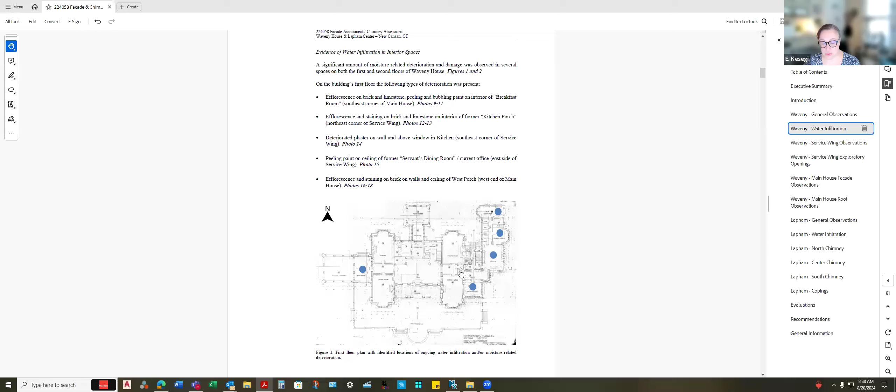There's photos of some of the interior damage within the building. This is the breakfast room where we had some efflorescence, that white staining that you see on the brick there. That is below a recently replaced roof on the terrace above. Again, in the same room, we have bubbling paint, staining on the stone, staining on the brick.

And then these are all located, this is what they would call the kitchen porch originally. We have some staining above the windows. And then this is in the kitchen where we have significant plaster damage in the corner of the space. There's also leaks on the first floor in an office storage space, and then some more efflorescence. This is the west porch area.

These are the leaks that are concentrated on the second floor. Again, pretty much evidence of water infiltration in every one of these second floor spaces on the service wing. And then there is some minor water infiltration damage on the areas that are also indicated in blue on the second floor.

Following up with some photographs of the extent of the damage related to the leaks on the east elevation of the service wing. Mostly it's shown as deteriorated plaster, bubbling paint. We did not see any active leaks when we were on site, but obviously all of these areas of damage are indicative of there being moisture within the walls that is entering the building. So you can see it's pretty significant in these areas.

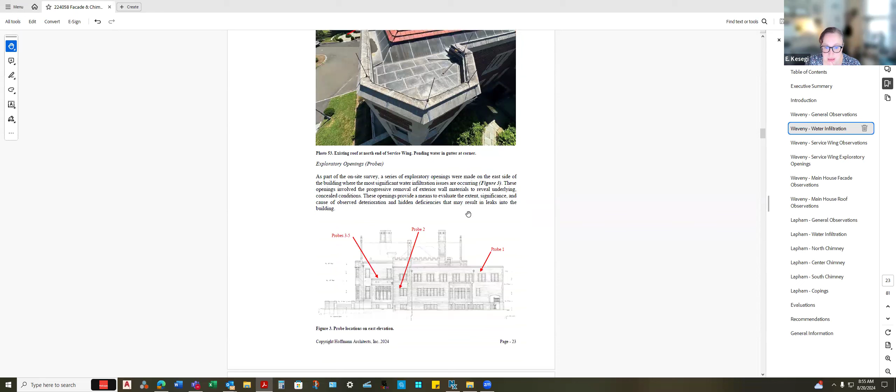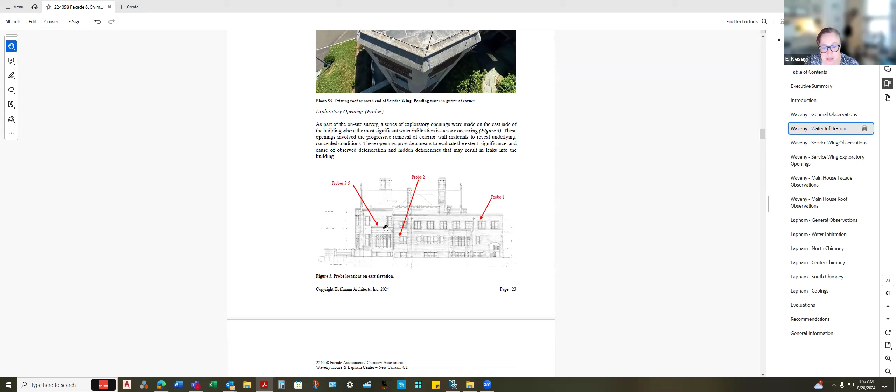So what we did was on this east elevation of the service wing, we did a couple probes to see if we could see what was going on inside the wall assembly that might be contributing to these leaks. So we did one above a window on the second floor. We did one above a window on the first floor. And this is that kitchen area where I showed you the photograph of the significant amount of plaster damage. And then we did a couple openings on the roof above the breakfast room.

So this is a probe we did above the second floor window. We removed a section of brick. We noticed that there is an existing copper flashing that was installed at some point. That does not appear to be original to the building, because this was one of the only locations where we found this flashing. So it's possible that there were past leaks going on and this was someone's attempt to remedy that situation. So we basically started removing bricks, wythe by wythe, to get as close as we could to the interior of the building without disrupting any interior finishes.

So here you see, we went all the way back from this location. I think it was about 3 to 4 wythes of brick before we hit this back side of the copper flashing. This terracotta block that you see in the back, on the opposite side of this is actually where you have your interior plaster applied. So if you were to open up the wall, you would see the other face of this terracotta block. So it looks like they installed the flashing and did put a vertical leg on it, which is good because you want to have a location where if the water gets in, it can't go back into the assembly.

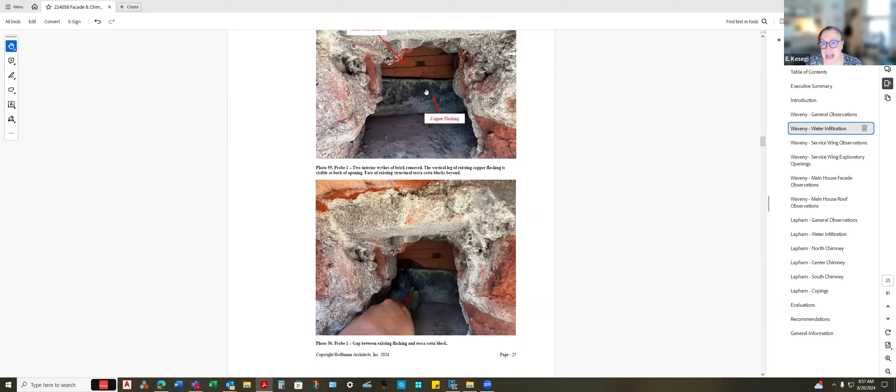However, there's a significant, probably half-inch gap between the backside of this flashing and the terracotta. So what that means is any water that gets into this assembly, that gets behind that back wythe of brick, can just get right into your interior wall assembly. Usually these terracotta blocks, also with most backup materials, they are, how do I describe this? With face brick, we make sure all the joints are solid and fully tooled and the brick is set in solid mortar.

Usually with backup materials, it's a little less of a quality of installation. So you'll find that there's holes and gaps between these terracotta blocks where the mortar doesn't fully cover the joints. I believe too that this might be an opening within the block itself. So there's many locations where the water can actually, once it gets to that point, get into the building. So you want to do as much as you can to prevent the water from getting to that point.

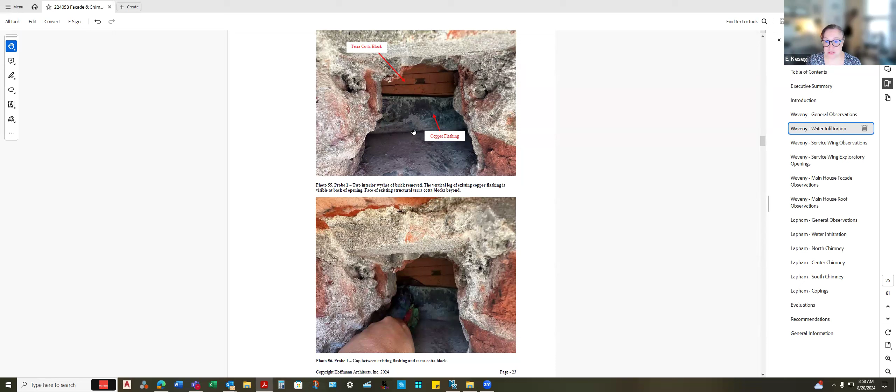So this is just showing here where we can actually fit a tool behind the flashing at this point. Proper construction would be that this flashing would be terminated and sealed across the top, so that gap wouldn't exist. So that water that runs down the face can hit this flashing and then somehow make it out through the face of the brick.

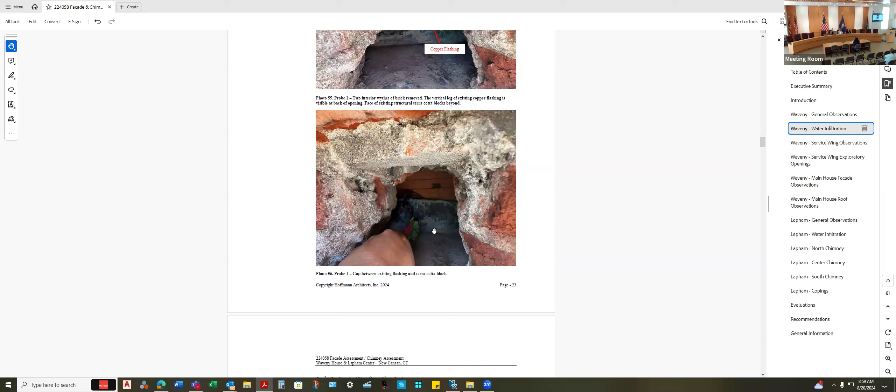So this was the second probe that we did above the kitchen window. And this is more evidence of the original construction. So we don't have that flashing, which was likely a later addition. So it's just solid masonry from the face of the wall all the way back. We did find a piece of steel in here that we assume is supporting the stone behind us. So it's spanning the opening. It's basically a lintel spanning the opening and supporting the stone and the brick above.

You can see here what I mean about the condition of the mortar joints in the interior wythes of brick. Not of the same quality as the outer wythes. So if water did get in here, there's many locations where it can get behind the mortar and into the wall. Did not see any indication of rust or deterioration of the steel itself. Right now, I think what we feel is the water infiltration on the kitchen level is more associated with something going on at the top of the wall with the copings and the open joints in the limestone, as opposed to coming in through the window head.

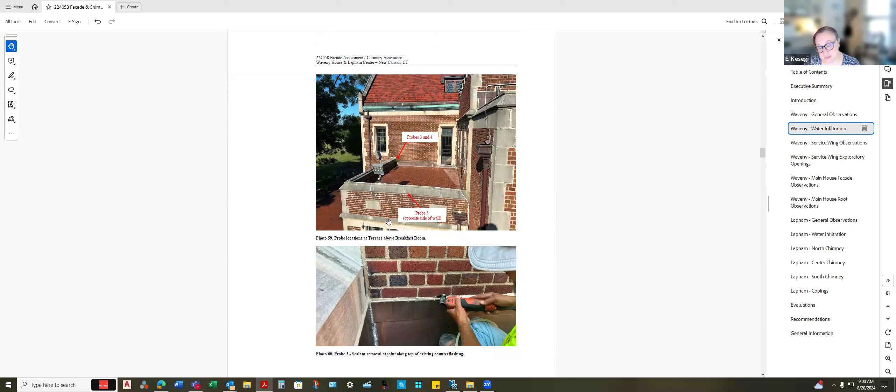The last 3 probes that we did, as I mentioned, are on the roof above the breakfast room. So if you recall the photos I first showed where we had the efflorescence on the brick wall and the interior, the peeling paint, deteriorated mortar joints and things like that on the inside. This is the roof directly above. This roof, I'm not sure when it was replaced, but it is also a recent replacement. And you can see here based on the condition of the copper flashing. Again, here's a condition where they sealed between the brick and the flashing.

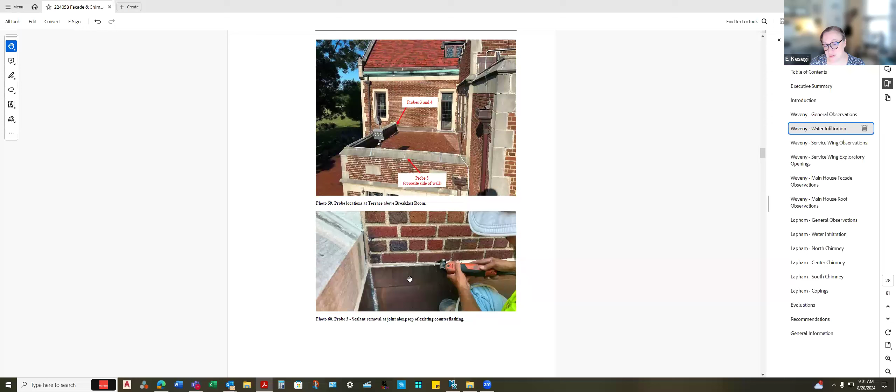So we opened this up because we just wanted to see how far the flashing went in. Based on the fact that this brick looks like it has not been replaced, the mortar matches from top to bottom of the wall, we assumed that this was not a flashing that extended far into the wall. So when we opened that up, we found that basically what they did was what we call a reglet flashing, which is they bend the flashing a little bit to kind of wedge it into the joint, and then they seal over it. So really this flashing only goes back maybe about a half an inch.

And this is meant more to keep water from the roof assembly from getting into the building. It's not meant to do anything with the wall assembly itself. So that being said, any moisture that gets in at the top of the wall can basically flow freely down to the wall below, which is probably what we're seeing in the inside of the building when we see the efflorescence above that archway in the breakfast room.

So we continued around the perimeter of the parapet wall on this roof, and we cut out some more sealant. This was below a limestone coping in the flashing, just to see too. We didn't see any indication that these copings were removed and reset during the roof replacement project. So our assumption was we were going to find the same condition that we found here.

When we opened it up, this is a foam backer rod that fills the joint. And then as soon as we opened that up, you see this drip of water. So there was water that came out of this joint when we opened it up. So water that gets in here, because this is a sealant joint, it can't get out. So it's going to go into the wall.

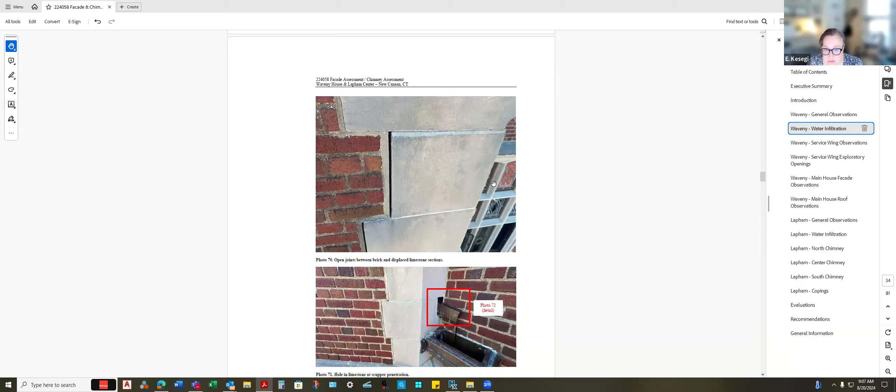This is what I was talking about with the roofs above these bay windows. So this is on the north elevation, the main entrance elevation of the building. And at these window bays, there's a copper roof above, again, a scupper cut through the wall to allow drainage of that roof that drops into this box here. And you can see where they cut this sleeve through, there's a significant opening that is not sealed off. So you can see here, there was actually a bird's nest inside this particular opening.

In addition to allowing birds in there, it can allow moisture in there, insects, all sorts of stuff. So again, typically what you'd want to see is a fully lined opening through the wall that comes out and terminates against the face of the wall so that you know that that entire length is protected.

So seeing this again shows that more than likely it was not this. They used the old opening for the old sleeve and just put a new sleeve in, but did not finish that off. And this looks like the same age as the other scupper detail. Yeah, because it's the brown copper, it hasn't had time to turn green with verdigris, so it's obviously not going to be something that's original to the building.

Yeah, and this was not lined, so we probably can assume the one that you couldn't see the inside was also. Yeah, probably to do that would require some masonry removal, which would be a lot more involved than just running a sleeve through the existing opening.

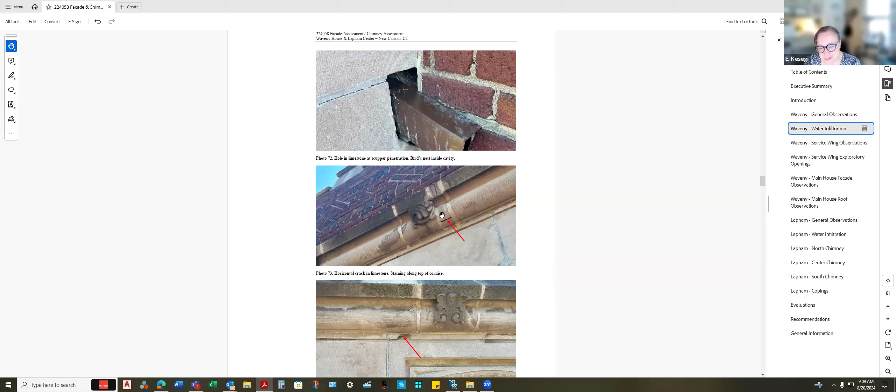These are just some typical conditions that you'd find with limestone of this age. There's some spalling, there's an odd crack here, perfectly horizontal, which is strange. Again, here you see the open and deteriorated mortar joints.

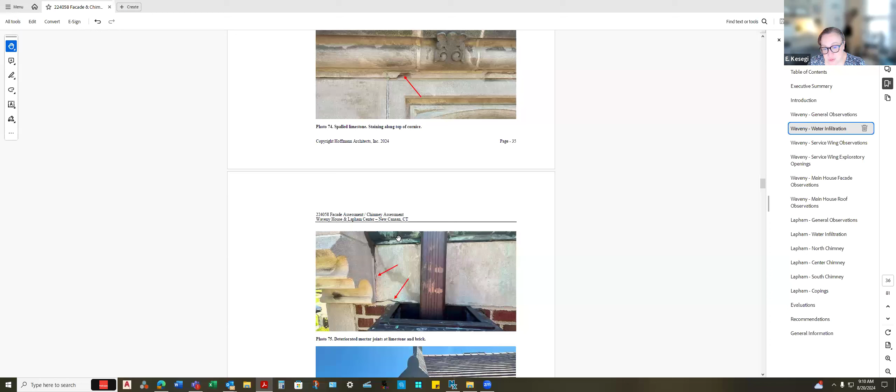So you can see this gutter. It looks like on the main house, they did not replace the exterior gutter. They lined it with new copper. So you can tell this is older copper and this is newer materials. You can just see the difference in the weathering.

This is the end of one of those gables where we see missing mortar, deteriorated mortar. And if we go down further, you can actually see daylight underneath between this top stone and this bottom stone. So this stone itself has become disengaged from the mortar bed. This is also another view of that same location. And you can see there's a little bit of, looks like displacement as well. There's another condition where the sleeve was run through the wall. This is open.

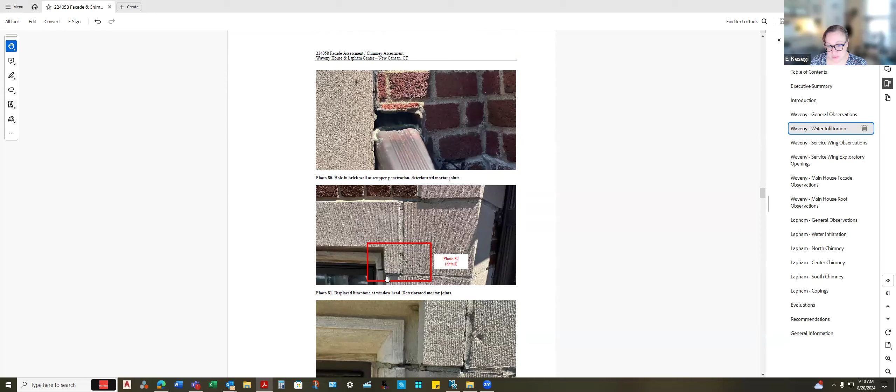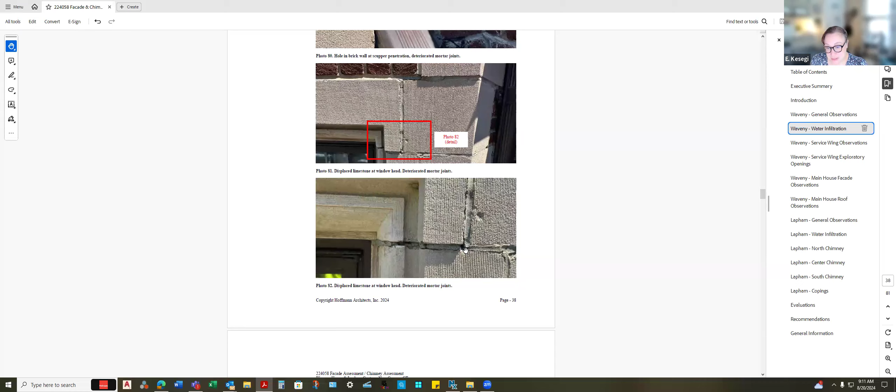Another location similar to the east elevation of the service wing, where the lintel above the window looks like it's become displaced a little bit from the main surface of the wall. And you can see that evidenced by the deterioration in the mortar. Whether the displacement caused the deterioration in the mortar or the deterioration in the mortar caused displacement, either way, these two are contributing factors to this condition.

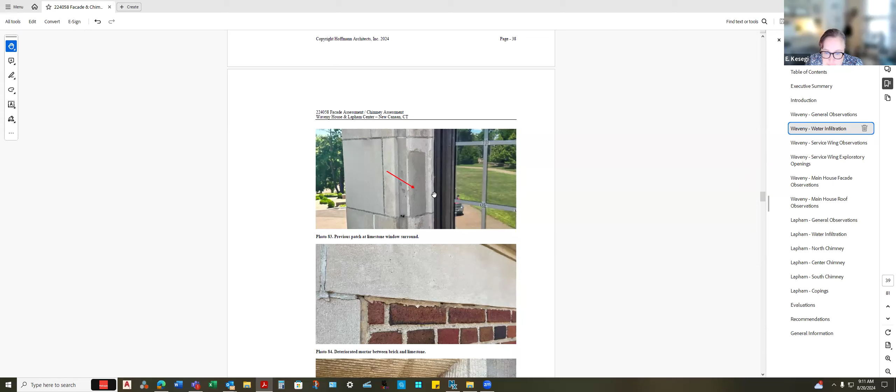Has some areas where you have previous patches that look like they're starting to fail. Not sure how this patch was installed, but usually if there's a deep patch, you want to install pins into the stone to help hold the patching material and the stone together. But you see some spalling around the existing stone right where the patch is. So these are basically starting to fail, and obviously the color isn't quite a match to the existing stone either. Just continuing around with deterioration of mortar at the window openings.

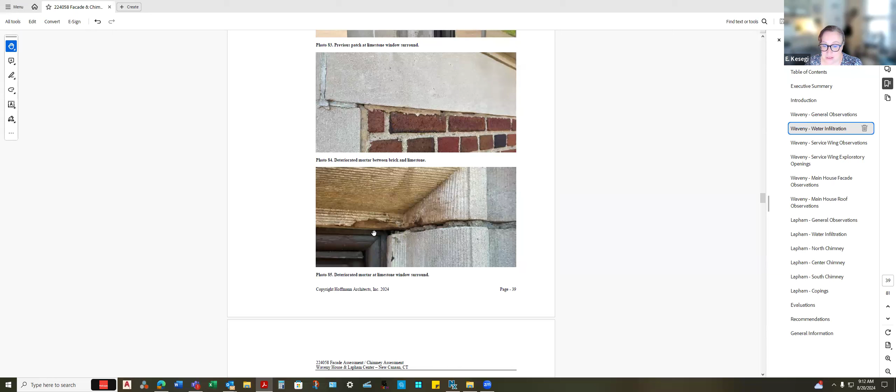We had some locations where it looked like there was water coming in at the window heads. Again, there's no flashing above this stone or above the window like we would see in modern construction. So any water that gets in here can easily get between the window and the stone and come into the face of the building.

So this is more of a cosmetic thing. You see runoff from the copper. That's kind of hard to prevent when you have copper metal elements on the facade over stone. See that everywhere. That's just something you can remedy with cleaning.

And some areas where, so this is the condition like I was talking about originally. This is at a cornice. This is what we call a skyward facing joint. So this is the top of the cornice, so it faces up. Originally, they had a mortar joint here in original construction. It looks like from this condition, there were some issues with this mortar joint, and somebody came in and basically just put a very surface cover of sealant over the top of it.

That's really not the way to do it. The proper way to do this would be to cut out that deteriorated mortar joint, put in a backer material, and put in a full sealant joint. So this sealant along the top of this cornice, and it looks like it's pretty much everywhere along the top of the cornice, is going to start to fail, and basically you have an open mortar joint again.

So just going through some cracks, very typical stuff. This is all repairable defects. Again, another location where they ran the sleeve through the wall, but then we also have a gap between the brick and the stone itself. Looks like it's sealed above here, but down here it's wide open. So again, anything that comes off the roof that comes out this hole that's not sealed off can get right into this joint.

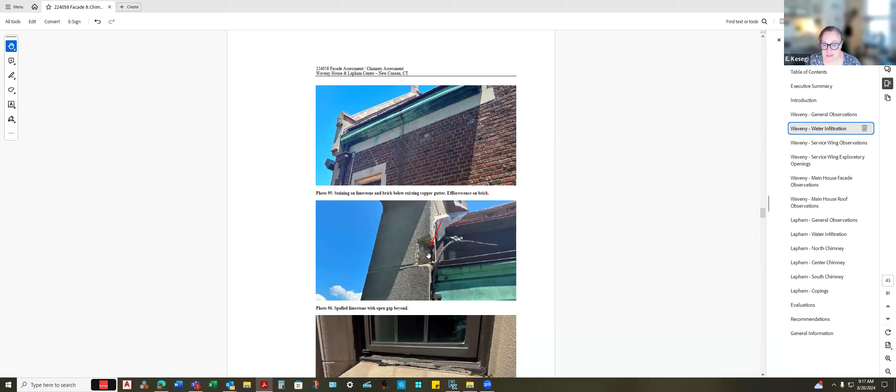This was a stone that looked like it was previously an attempt to patch it, or what we call a Dutchman, where they installed a piece of stone to repair a broken piece of stone. But when we were here, the stone was actually falling out of the wall, so we took it off so it didn't fall on anybody. Usually with a repair like that, you want to see some anchor pins in there that hold the new stone to the old stone, and we could not see anything like that. So that's something that needs to be fixed at some point.

Some areas where you have deterioration at the wood sills at the windows. Again, this is just typical aging of a wood windowsill. Needs to be repaired or replaced if it's fully rotted, and then repainted to match. More conditions like that. This one's a little bit more deteriorated. We actually see pieces of it starting to come off.

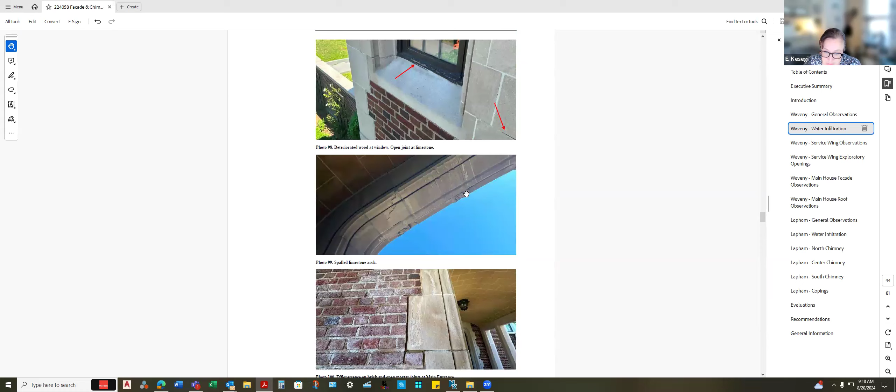Again, some spalling on the underside of an archway. So that's showing that there's probably water. This is below the sleeping porch. So this is on the west porch. Probably water in the wall above.

This is right at the main entrance of the building. Aside from the white staining, it looks like someone came in, started to cut out these joints to repoint them, and then didn't finish repointing them. So in some locations you can see they kind of overcut the joints. So this really just needs to be finished off and repointed. But I thought we'd make notice of that because it's right at the main entrance of the building.

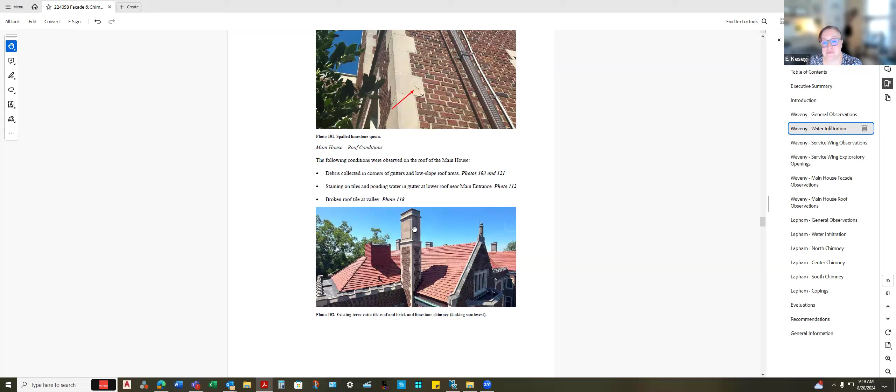Some surface spalling of the stones. The roof itself, again, looks like it's in very good shape. There is some typical weathering of the stone at the chimneys and the joints and things like that, but nothing major. Some debris collected in the corners of the roof, maintenance item. The standing seam roof on the top looks like it's in good shape. Just scrolling quickly through these. Yeah, this is just kind of typical weathered stone. Just looking at the flat seam copper, also in good shape.

This is, we'll call this a gutter for lack of a better word. This is along the main entrance of the building. Again, looks like it's draining properly. We don't see any ponding water or anything like that. So like I said, here, it looks like when they replaced the roof, they ran the new metal down and onto the old gutter. So the new copper ends where the old gutter ends.

Just kind of scrolling through these, a little bit of staining on the terracotta. Again, a cosmetic thing. It looks like this gutter might have some debris in it that's collecting water. This is between the main entrance and the entrance portico and the building itself. Did find one small area where there's a broken terracotta tile, and that's actually behind this chimney. This is the west porch and the sleeping porch above. Again, it's debris collected in the roof.

So that's Waveney. So I don't know if you want me to go to Lapham and then talk about the recommendations for Waveney, or I can talk about Lapham and then we can talk about all the recommendations. Why don't we go on to Lapham and then we can discuss all the recommendations. Okay. Yeah, can I ask a question first, Erin, just to make sure so people know? So your review of this, you checked out the entire building, every external surface and all the roofing. So it was a completely thorough review of the entire structure, correct?

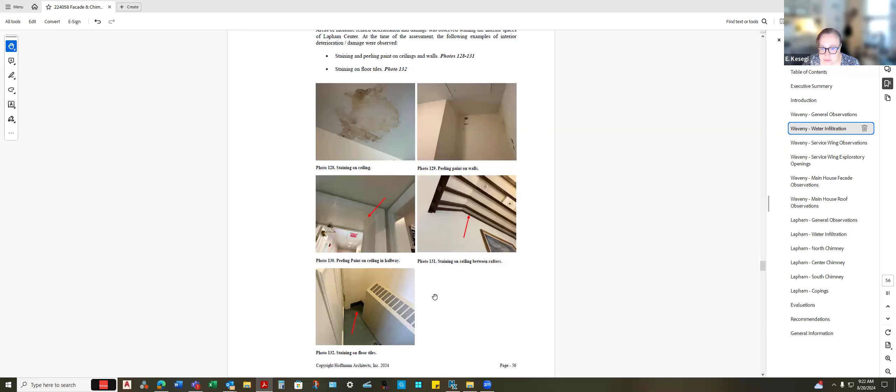So at Lapham, we were concentrated mainly on the chimneys. So you have 3 chimneys here. For our purposes, we name them north, center, and south. So this is just locating them in reference to other areas of the building. So on the inside of the building, it looks like you have some leaks right in the areas below the chimneys, mostly seen in locations where you have some staining and some peeling paint. In this one location, it looked like there was some standing water on the floor. So that's why we focused our attention on the chimneys themselves.

So what you have is basically a stone chimney. This is granite. Then you have a limestone chimney cap with terracotta flues, and then you have these side walls coming down each side that run along the slope of the roof. They again have the stone walls, and then they have granite copings on the top with lead caps, similar to what we see at Waveney House. So all of these conditions that we see on each of these chimneys are pretty typical. We did go through each one to document anything that might be atypical, but I'll just show you one to show you what we found.

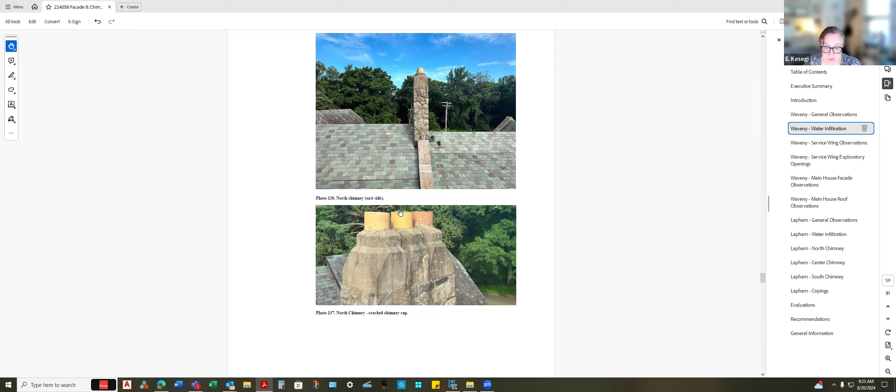The chimney cap itself, you see some surface cracking and some staining. Again, construction of this age, chimney caps we would normally see have a flashing between the chimney cap and the stone itself. This is just solid masonry. The flues themselves are terracotta that are just set right into the cap. And then on these sidewalls, we have copper step flashing that was installed the same time this roof was installed. This roof is not original to the building either, as you can see from the age of this copper.

So a lot of these joints, it's very typical in this type of granite rubble kind of coursing. It's not really coursing because it's very irregular. You end up with very wide mortar joints, and you can see why that might be an issue in some later photos. But this is typically what we saw at the copings on these side walls.

So you have the granite coping with this lead T-cap. The lead T-cap is supposed to extend down the vertical face of the joints like we saw over at Waveney. For some reason, when these were installed, they stopped them here, or later efforts cut them, I don't know. And through some other discussions, I understand that the copper went fully through these caps. So unlike what we saw at Waveney, where the copper just stopped, this copper that you see, I believe, goes under the full length of that course.

So would that change your evaluation of the need for the T-cap to come all the way down? Yeah, because you can put the T-cap as kind of a belts and suspenders kind of thing. If that flashing does extend all the way through, this could just be a regular sealant joint with a backer rod material and sealant across. Because right now, the lead cap is protecting the joint, but it's not fully protecting the joint. So it can be replaced if you want to maintain the aesthetic look of it. But otherwise, this can just be a sealant joint if this flashing does extend all the way through.

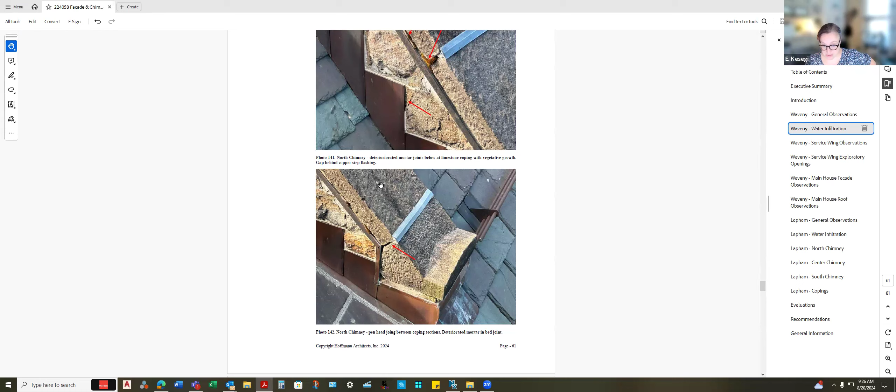If they did run the copper all the way through, that would mean they took the stones off and reset them. And I would wonder how they reset them, if they reset them in pins, and whether those pins are fully sealed off, or whether that's a possible source where the water that gets in this joint can get to where those pins are and get into the masonry. So that would be interesting to know if that was what they did.

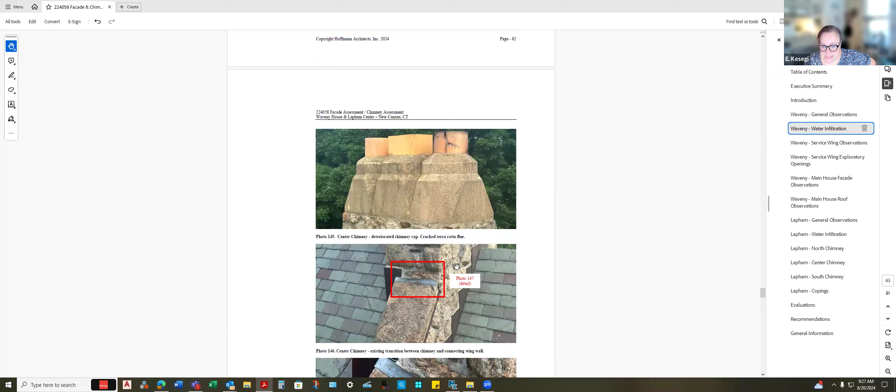So that condition basically is typical throughout. Every one of the walls that runs below the chimneys has that same condition with the lead T-cap, the coping set on mortar, and this copper flashing material, but the joints are open, the mortar's deteriorated. So there's different paths for the water to get in. You can see here, this is a difficult condition to make watertight.

So if they did run this all the way underneath the coping, I would hope to see that it would come up and terminate a little bit better against the wall of the chimney. Okay. Because if they just stopped it here, this joint isn't watertight. Yep. They can get water in this joint right between the stone and the flashing. Mhm. And at that point, the flashing is totally ineffective.

Again, just showing a lot of different areas where you have the same stuff going on. But you do see deterioration of these caps, quite a bit of cracking, water. Obviously, anytime you see this white staining, it's showing that there's water in the stone somewhere. You have some cracked chimney flues.

These look like they were abandoned at some point, because they were fully filled in with mortar or concrete. So we only have one that's open. A lot of times too, we want to see caps over these flues to prevent water, moisture, but also animals from getting into your flues and causing issues.

Sorry, Erin, why are some of those capped? Why are two cemented closed and one open? I'm assuming whatever these flues served is no longer operable, whether it was an old fireplace that was bricked up, or some other... Like, we don't use some of these fireplaces. Yeah, some of the fireplaces in Lapham have been completely abandoned. So that's probably why. And so then we just have boilers.

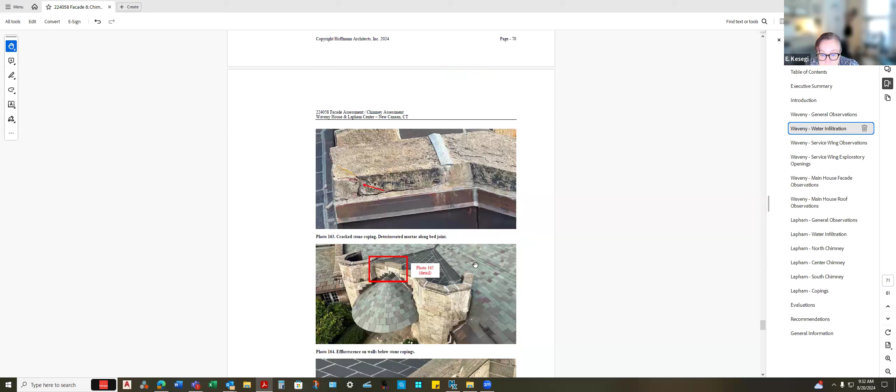Just looking at, I believe this was the old entrance to the building. A significant amount of staining due to water on the face of this stone from below the copings. Again, issues with the mortar joints, water getting in and coming down the face of the building. This is at one of the other gable ends, where you can see the mortar bed is almost completely gone at this side of the stone.

Again, in addition to waterproofing this joint, it's not giving the stone a surface to really sit on. This is what we saw very typically. A little bit of sealant on one side, maybe not so much. This is a very wide joint between the stones. It's just not a detail that's going to stand up to weathering for a very long time. Again, very deep mortar joints.

And this was an odd condition. We couldn't quite figure out what it was. So you see this old copper between the stones. It looks like it might have been someone's attempt a long time ago at flashing, but it's in an odd location for it to be doing much for the coping itself, and it would just create a weird line in the building. So we don't really think that this is doing much as far as weatherability and water tightness of the wall. So that's why there's this drip edge below.

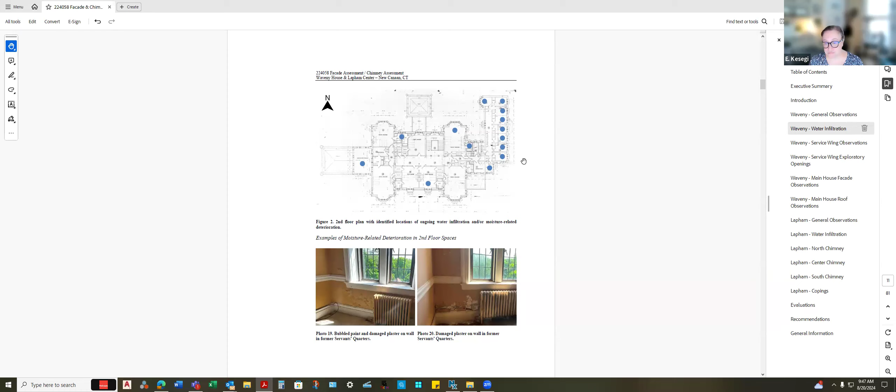So to do that, do you have to kind of scaffold the whole area to do that work? I'm just thinking when you break it up, if you have to spend a ton of money on the setup. Here, I'll show you. Yeah, what do you actually do? They could scaffold it, but it's only two stories high. So we were able to access those areas with a lift.

So they would probably do a window at a time where they can go in and open up the brick above that window, install the flashing. We could do something similar where they continued the flashing all the way across, but again, it would be done in sections. So I don't see them having to fully scaffold this. We kind of leave that up to the contractor as far as what they think is most efficient.

Elsewhere on the building, anything on the south elevation would probably have to be scaffolded because they cannot get a lift in here with the terrace and the landscaping. Here we were able to access pretty easily with a lift, so likely they would be able to do that as well. Anything that's over grass areas is a little bit difficult because the ground is uneven, obviously subject to moisture, things like that. So I'd say probably half and half. That makes sense.